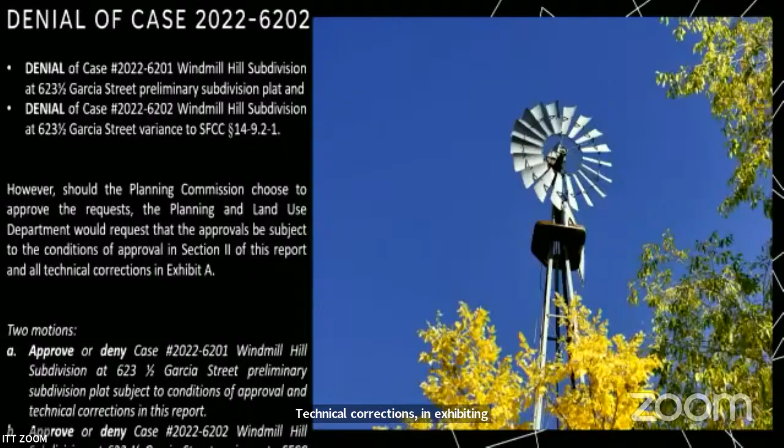There are 15 conditions of approval in the staff report. The technical corrections are found in Exhibit A. Following standard practice, staff will provide the applicant red line comments, and the applicant will make any necessary changes to comply with the conditions of approval and technical corrections, and submit the corrected plan sheets to the case manager to collect staff signatures. Should the Planning Commission approve the variance and subdivision, the subdivision plat shall be recorded prior to any vertical construction.

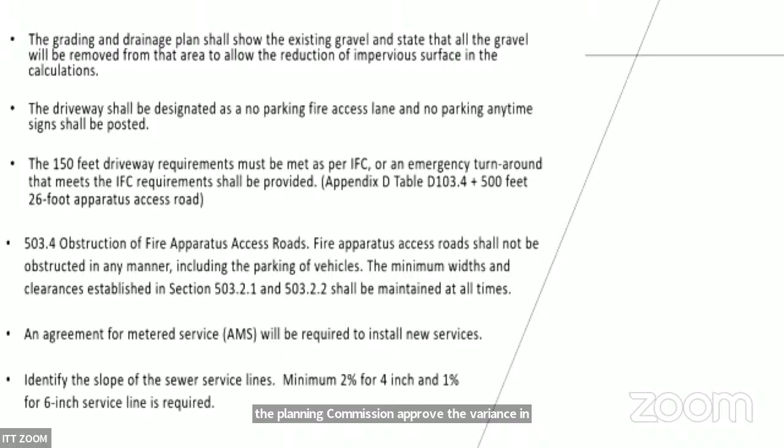623.5 Garcia Street is currently a 1.48 acre lot in an R3 zoning district that also lies within the downtown and east side historic district. There's a single family residence and a historic windmill on the southern end of the property. Neighboring lots include both R3 and R4 zoning districts.

This is our historic home right here, and the windmill is actually right here.

The subdivision will include 3 lots: lot 1 at 0.5 acres, lot 2 at 0.6 acres, and lot 3 at 0.38 acres, which creates a density of R3. The planned development will include 2 additional residences and yard walls, which are not yet designed. However, the property is within the downtown and east side historic district, so new construction and remodeling will be subject to Historic Districts Review Board approval.

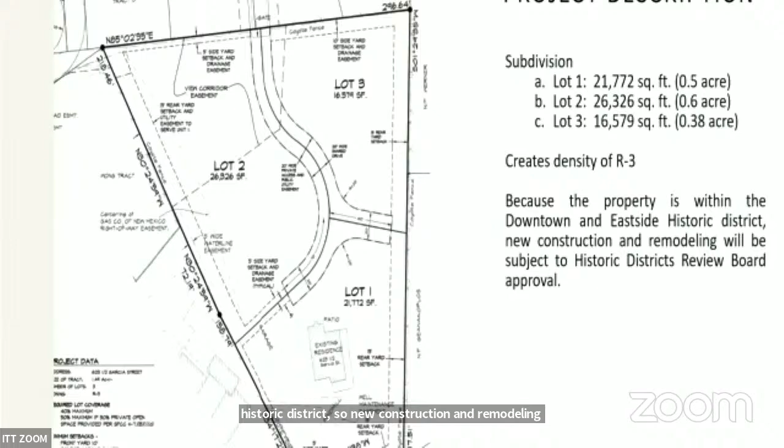Access to the proposed subdivision is off of Garcia Street via a series of private easements. I'm going to go through those for you.

So there is a 29-foot wide easement here, approximately 218 feet. There's a 20-foot easement here, running approximately 118 feet. There's a 38-foot wide easement that goes through here. This is an entrance into the property, it is 15 feet, and this is 20 feet.

Excuse me, we can't see anything that you're pointing at. Oh, my mouse here doesn't show. Okay, sorry, where? Can I come to the board with that? Help. This one, how does that sound? Okay, see if I can do this again.

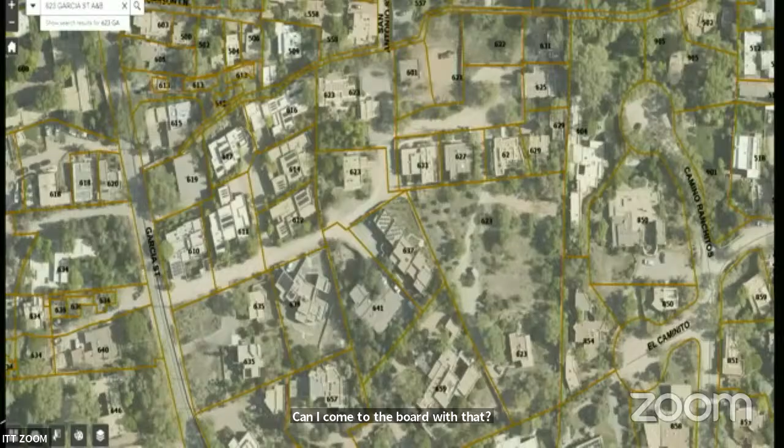So your 29-foot wide easement is here. This is the 20-foot easement here. This turns into 38 feet. This easement leads onto the property, it is 15 feet wide, and this leads onto the property at 20 feet wide.

There are currently 21 residences using the existing access easement. There are 2 additional residences planned, so there will be a total of 23 using this access.

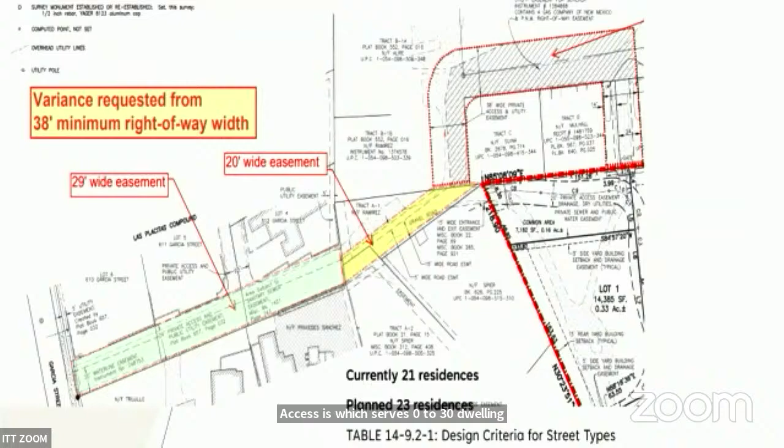Accesses which serve 0 to 30 dwelling units are required to be 38 to 42 feet in width and have design standards. The design standard is that this lane should have 2 nine-foot wide drive lanes, 2-foot curb and gutter, 5 feet of landscaping, and 5 feet of sidewalks on either side. In this case, the curb and gutter, landscaping, and sidewalks do not exist, and with the existing widths will not be able to be installed.

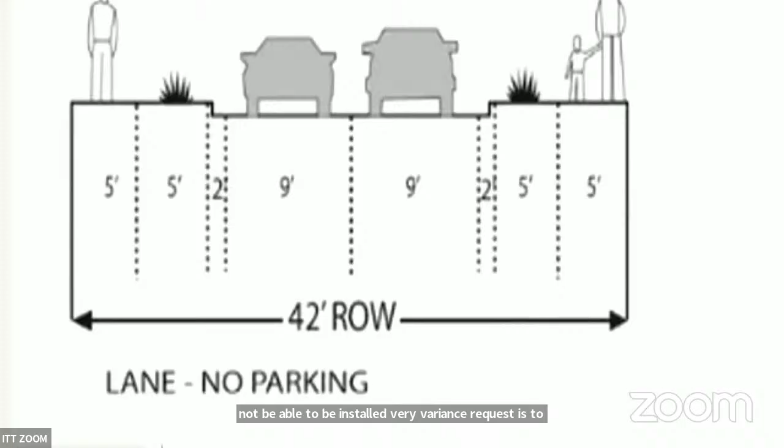The variance request is to have the narrower lane without the design required, having only drive lanes. Though not all criteria for the subdivision plat are considered to be met at this time, this is due to the need for the variance. If the variance to the lane width is approved, the plat for the subdivision can be approved as it will meet all criteria as long as the variance is approved.

Access to the proposed subdivision does not conform to the standards of SFCC 14-9.2-1 design criteria for street types, which requires a minimum right-of-way width of 38 feet for access to 0 to 30 dwelling units. The new subdivision does meet the density proposed by the future land use map and meets the general plan policy of infill development. This conflict and the increase in an existing nonconformity are the main reasons for staff's recommendation for denial of the variance and subdivision.

Staff recognizes that the request is similar to the case from 2012 for subdividing the same lot, which was approved by the Planning Commission in 2012. Staff has made a differing recommendation at this time based off of code interpretation and intent, with the understanding that continuing to make narrower lanes for increased numbers of residences increases risk and diminishes the city's responsibility for public safety.

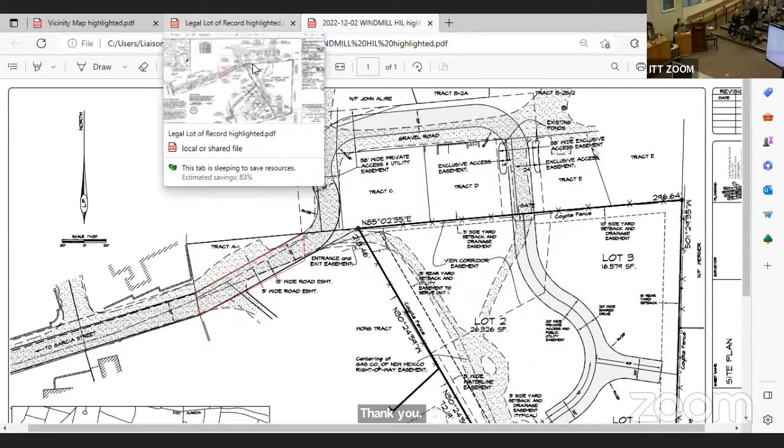Do any of the other commissioners have questions or comments? Commissioner Lawrence Faulkner: God, why am I having a hard time tonight? It's this mask, it's this mask I have on, I can't think properly.

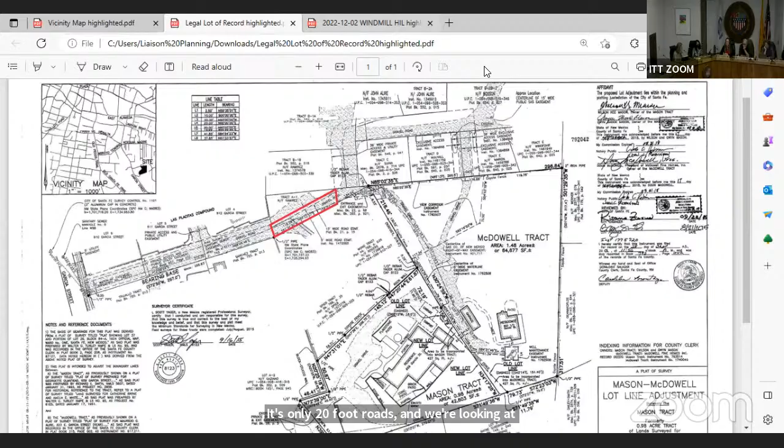I would just say this is one of the places where I feel as a commissioner that it's good we're working on the code, because I feel this is another place where we're probably going to have to rule from the bench, or at least have the opportunity to do so, which isn't the best way to do policy. But there are areas all over the city where there's no sidewalks and only 20-foot roads, and we need housing. So we're going to have to start looking at it in a different way than we've been looking at it in the past. Density is one of the ways we do that, and when you do density, you're going to lose some stuff, but we'll get housing out of it too. That's my only comment.

Any other questions or comments? If not, I'll entertain a motion. Madam Chair? Yes, I would have a question of the applicant. Okay, Commissioner Morondo, go ahead.

I just want to make sure I understood from the application and your comments earlier, two points correctly. One is that the original improvement was for 3 residences, and that's been reduced to 2. And the second point was about the area served by the later section of this road—can you speak to how many houses are on that area of road, in the neighborhood of 10 feet, and what you're going to be able to improve it to?

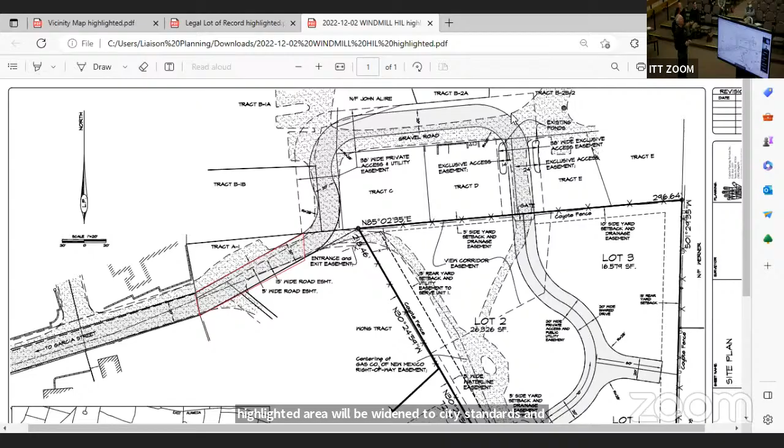No, it's going to be widened to code required city standards from that point in. The only section we'll be able to do at 20 feet will be the area highlighted in red. But when I say improved, I'm saying it'll be resurfaced, compacted. The area beyond the red highlighted area will be widened to city standards and resurfaced as well, which services all the houses back there. Does that answer your question?

Do you know the number, without your added load, who's on that road? Specifically, after it winds around Tract C? 1, 2, 3, 4, 5, 6, 7, 8, 9, and 11 with the addition of the 2 new units at 623 that we're requesting. Thank you, I appreciate it.

Thank you, Madam Chair, if you'd allow me to just make a comment then after my question. Sure. I suppose in this case, I completely agree

with Commissioner Faulkner that this is in sort of an interesting area of the code, and ruling from the bench is not always great. But in this case, what's interesting to me is it's true we're increasing a nonconformity if we approve the variance, but the proportionality of that - the fact that we're adding a relatively small amount of load to the existing situation - and I think there's a strong argument that those 9 units, or those 9 residences, have a safer situation because of this. To me, that argument is the most compelling in this case, that this condition exists all over the city. And for me at least, it's compelling that they're going to be improving the overall situation from what it exists. Thank you. Thank you, Commissioner Morondo.

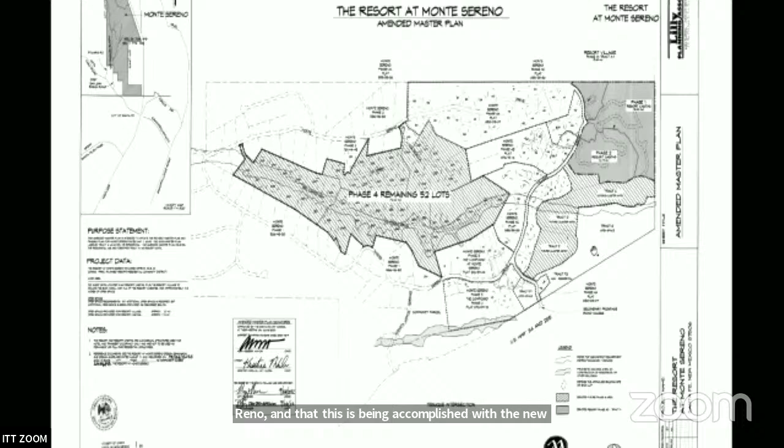I'm going to, if you can pull up the next slide, which is the development plan that we're reviewing tonight.

The cluster housing will involve a total of 50 units. There's 30 units located within the area previously identified as Tract C and D, which are directly east of the resort site. And maybe you can point those out, Amrit. All of these will be 2-story duplex townhomes with 2-car garages.

An additional 20 condominium units will be located further to the east, in the area identified as Tract E. These will involve 5 buildings, 2-story unit buildings with 4 units in each building for a total of 20 more. That makes a total of 50 in all.

There'll be 3 different home designs ranging in size from 900 to 1,200 square feet for the 4-unit buildings on Tract E, to 1,200 to 2,900 square feet for the townhomes located on Tract C and D. The architectural design can be described as soft contemporary Santa Fe style.

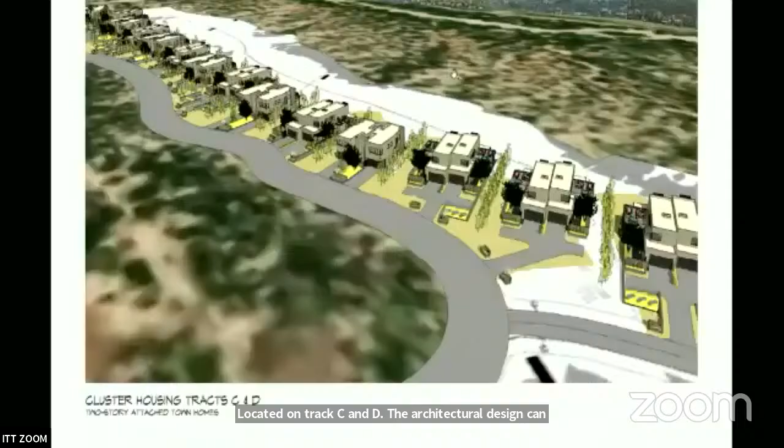And Amrit, if you can pull up the 3rd and 4th slides. These are the architectural renderings. These slides are meant to provide you with a flavor for the architecture being proposed.

The first slide is up in front of you tonight. It illustrates the 30 housing units that will look like what it will look like on Tract C and D. These are 2-story duplex townhomes, which will appear as large homes carefully sited to maximize mountain views. None of these homes have been located in the Ridgetop district.

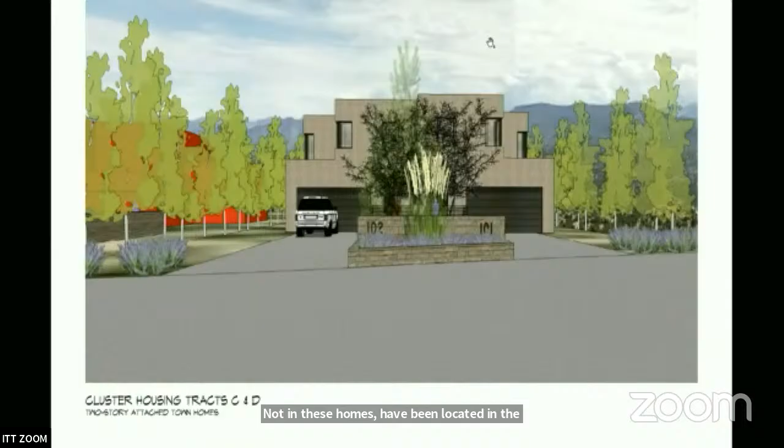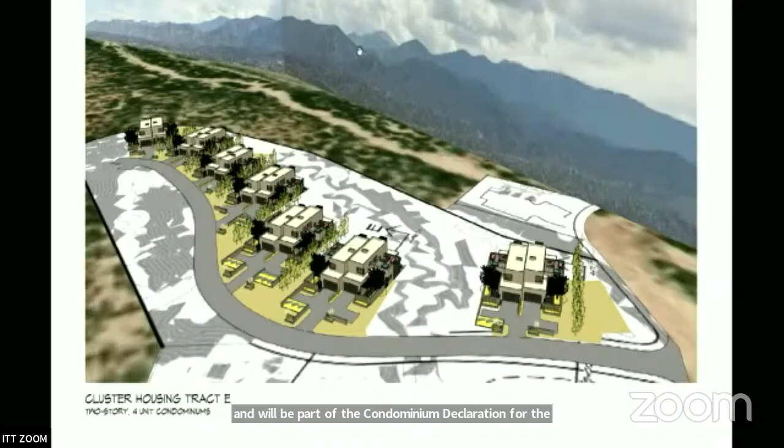The additional slides illustrate the 20 condominium units that are planned for Tract E. These plans are preliminary architectural designs on both of these tracks. The developer will have to submit detailed plans at the time of obtaining building permits. The draft set of design guidelines has been developed and will be part of the condominium declaration for the cluster housing, and these guidelines will ensure that the houses are compatible with the architecture throughout the Monte Sereno community.

We'll bring back the development plan slide, please, Amrit. Due to the remote location of the cluster housing in the northeast section of Monte Sereno, it is anticipated that the proposed development will really have a minimal impact on the rest of the community of Monte Sereno.

However, the cluster housing will have an impact on the resort site. It will be visible from the resort looking easterly. It will also have some impact on the lots that are just to the north side of Village Drive. Therefore, one of the goals of the development plan for the cluster housing is to recess the roads and the building pads, and we've done that approximately 4 feet by depressing the roads and the building pads. This will help to minimize the impact of those views.

Earth tone colors, a depressed access road and building pads, and appropriate landscape screening will all work to further minimize the view of those buildings. The site plan also proposes an extension of the trail system for the resort. I'd like to point out that we really have in excess of 3 miles of trails either built already or planned to be built, and we will be adding to the trails between these tracks. If you look, you can see the dotted lines between Tract C, D, and E.

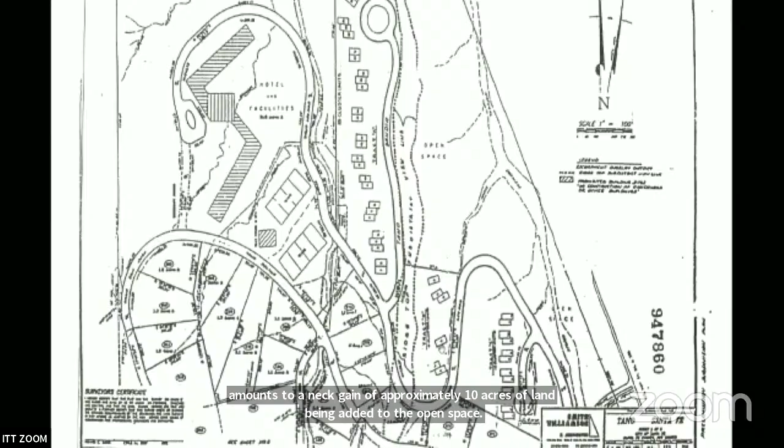This greatly reduced the amount of necessary tree clearing and grading. The additional advantage of the revised access is the addition of open space gained by vacating this right-of-way, plus the additional land that is no longer required for development on Tract D. This amounts to a net gain of approximately 10 acres of land added to the open space in this area. Now, if you can bring back the final development plan, Amrit.

Part of this application, we are applying for final subdivision approval for the cluster housing tracts. The final subdivision tract plat will also include the adjacent open space tract and the tract dedicated to the sewer lift station number 2.

Zoning compliance: as previously stated, the property is zoned Planned Resort Residential Community. The cluster housing units provided for in the A&D agreement are in conformance with the zoning, which encourages a variety of housing types.

We also have some variance requests. These variances have been reviewed and recommended for approval by city staff and are part of this application. They are basically related to terrain and stormwater management for road construction, and have already been approved in the annexation and development agreement. They just relate to the mountainous terrain we have in this area.

In closing, I would like to state our proof of substantial compliance with the preliminary development plan approval. As per section 3.1 of the annexation and development agreement, the developer has the vested right to develop the property in accordance with the approved plans, the A&D agreement, and the land uses permitted in the PRRC zone.

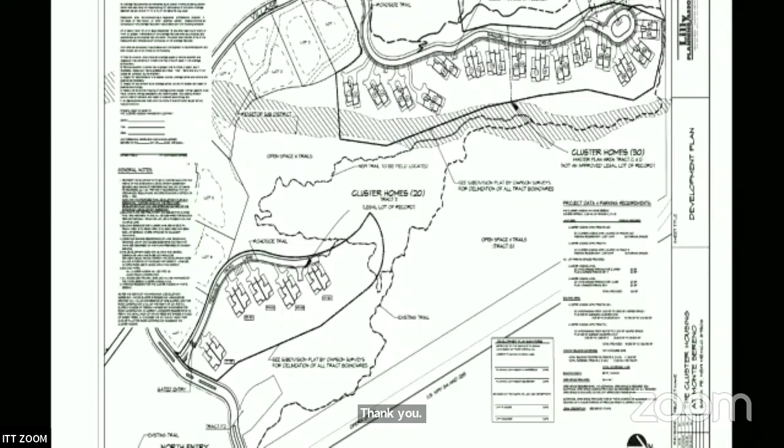Commissioner Clow: I did read through all this, and I'd like to hear in your words how, whether it's captured in the original agreement that led to the first stage or not, how you are addressing the issues of affordable housing in this development, which is clearly an upper scale development.

Actually, the affordable housing requirement is met in the annexation and development agreement. I don't have that in front of me, but it's paid for at the time of building permit application.

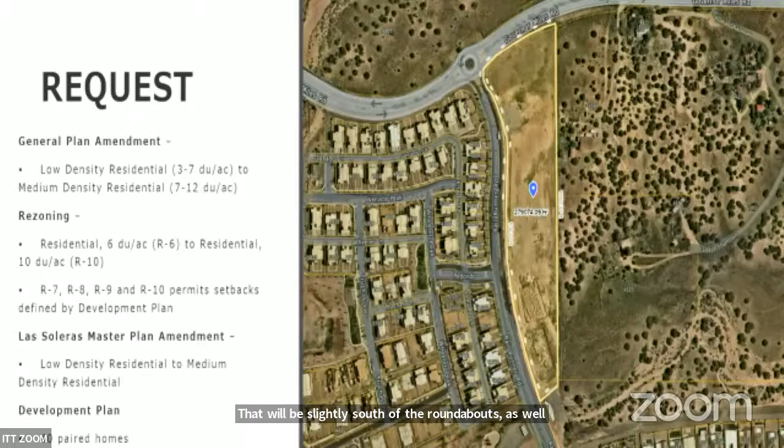The primary roadway, Redondo, goes into the existing Villas de las Soleras development, directly across the street, and will be the main access point for the subject development area. There will also be an emergency access point slightly south of the roundabout. The detention is planned for the southernmost portion of the site. Does that help? Great, all right, moving on to the rezoning.

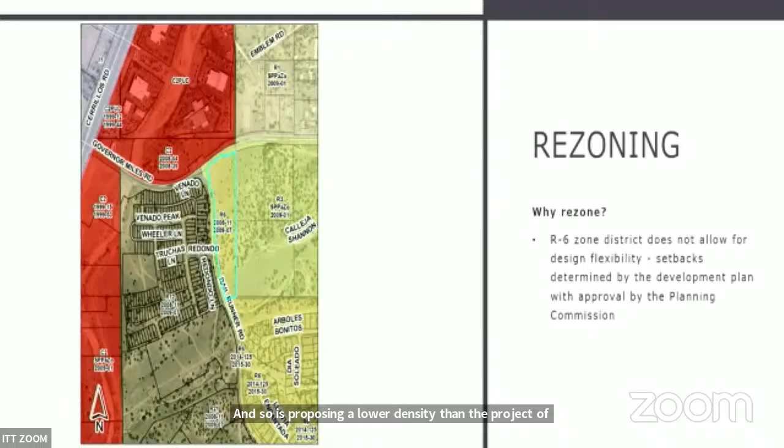The existing zoning category is R6. It was intended as part of the Las Soleras master plan to be a transition between higher density neighborhoods and lower density neighborhoods. To the east it's predominantly large lot, single family detached units. However, the applicant has decided that the same product would be advantageous for this tract of land, and is proposing a lower density than the Villas de las Soleras phases 1 and 2 across the street, at 5.8 dwelling units per acre.

The master plan amendment - I've gone over this a bit. You can see it highlighted in red up there; it would go from R6 to R10, or medium density residential. Here's a view of the site.

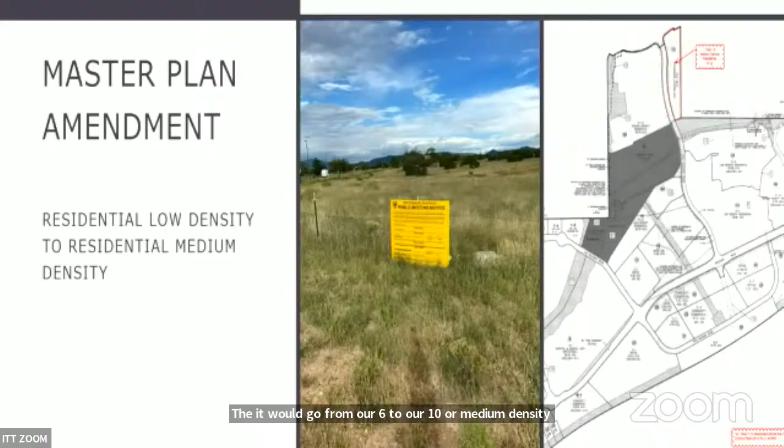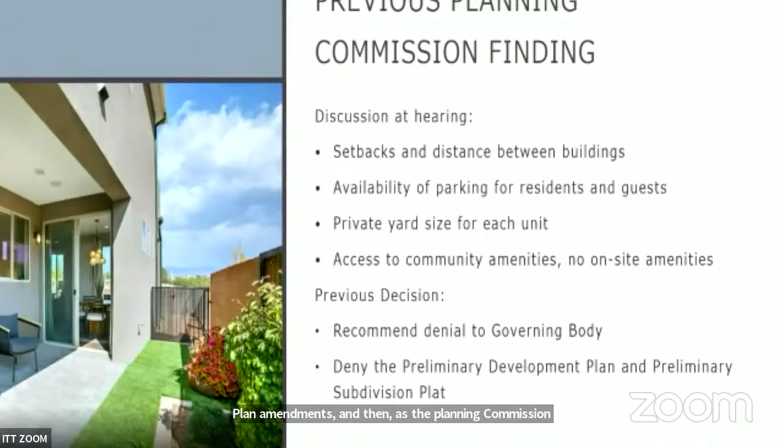The finding at the previous planning commission meeting included discussion of setbacks and distance between buildings, availability of parking for residents and guests, the private yard size for each unit, and access to community amenities. There was concern that there were no on-site amenities. As stated previously, the previous decision was to recommend denial to the governing body for all of the general plan, rezoning, and master plan amendments. As the planning commission is the final authority on the preliminary development plan and preliminary subdivision plat, that was denied, and it was never appealed to the governing body.

With reference to the development plan layout, the homes will face similarly to the fronts of homes further west on Governor Miles Road, so there'll be presence on both Governor Miles and Rail Runner in terms of 360-degree architectural ornamentation and detailing. There are some units along private drives on the eastern portion of the site, and some green spaces towards the south.

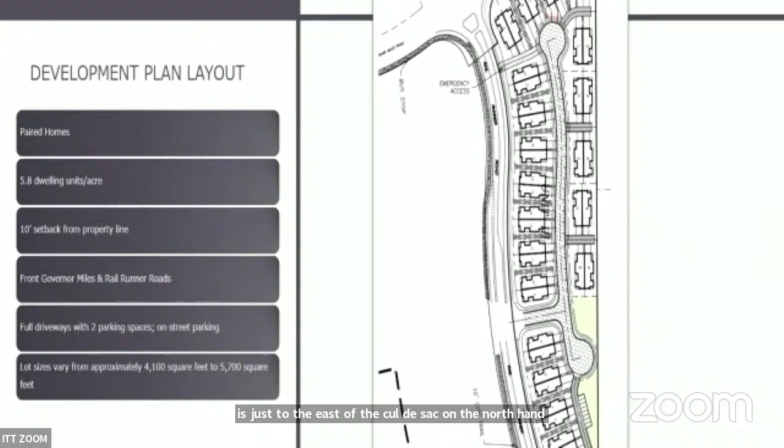Predominantly, the area furthest south is the detention area. But as a condition of approval, staff has asked the applicant to amenitize the space just east of the cul-de-sac, on the north-hand side of the southern cul-de-sac, so that it has a pocket park type of feel. There will also be access to the park amenities in the first phases of Villas de las Soleras across the street. One discussion point during the development plan review was the emergency access.

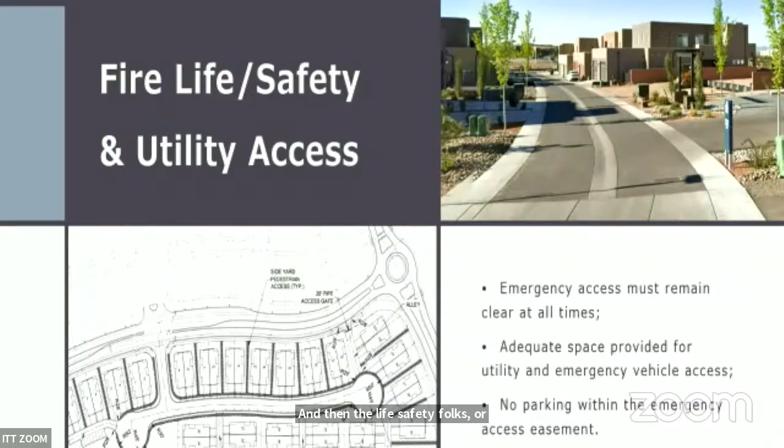Originally, there was discussion about whether there could be 2 full access points rather than one emergency access and one single entrance, but it was determined the intersection would be too close for that. On the right-hand side of the development plan, you can see the access point and access gate, which was redesigned to accommodate both fire life safety and utilities. There were concerns about having that access, and with these denser developments, there's also been problems with people parking in the emergency access, preventing life safety personnel from gaining access that way. So if there's a problem with the primary entrance, there would be no other way for them to get in.

So with reference to the staff recommendation for the preliminary subdivision plat, staff found that there is regard for the natural features and other assets. It is designed in the best interest for the public health, safety, and welfare. The infrastructure design, improvements, and dedication standards are met. And provided that the rezoning is approved, there will be no nonconformities.

So once again, going back to that issue, there's only certain zoning districts that allow for setbacks to be determined by the development plan. And just to note, the setbacks as they were concerned before, the distance will be 20 feet between each building, so there will be a 10-foot setback and a dividing yard wall as well.

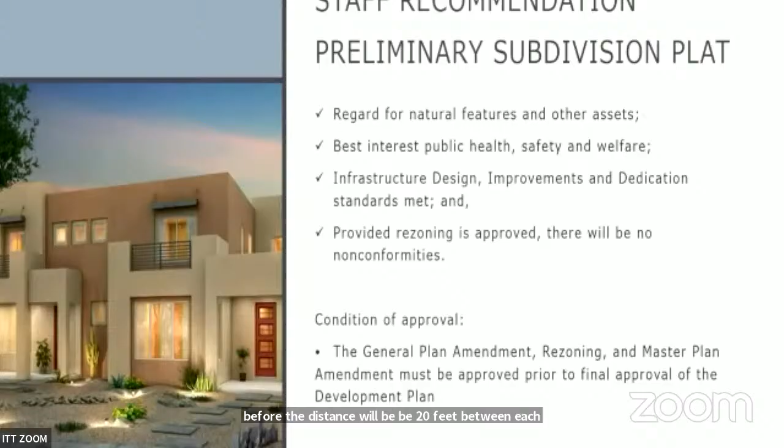And once again, this decision will not be final until the City Council finds and approves the general plan amendments, the rezoning, and the master plan amendment. Staff would like to add a condition of approval that must be met prior to final development plan and final plat. That concludes my presentation.

Okay, any other clarification questions? If not, we'll hear from the applicant, and it would be great if you could point out what was changed from the last design.

Do you swear under penalty of perjury that the testimony you're about to give is the truth, the whole truth, and nothing but the truth? I do. Please state your name and address for the record. Yes, my name is Nathan Manzanares, and I'm with New Mexico Land Solutions at 915 Mercer Street, Santa Fe, New Mexico.

Thank you, Heather, for your in-depth presentation. As Heather stated, this has a pretty lengthy history, but hoping to clarify some things. The biggest is the dimensional standards that are required under an R10 in order to design the type of product that we're doing. You can't design attached townhome units under an R6 zoning. So the rezoning request was asked in order to finalize a design.

And I'll do a comparison of what the 44-unit proposal looked like and the new and improved 40-unit proposal that really does enhance quality of life features that the Planning Commission wanted addressed. So as Heather stated, this project is located between Governor Miles and Rail Runner Road.

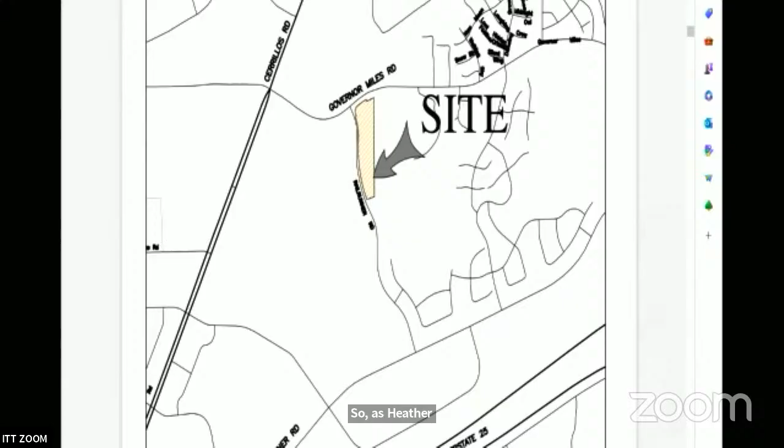Here is a phasing plan of the overall Villas de Las Soleras. Units 1 and 2 are to the west of Rail Runner Road, and unit 3 is to the east. The intention of Villas de Las Soleras was always to provide the townhome product to the Las Soleras area, providing a mix of housing types in the overall master planned area.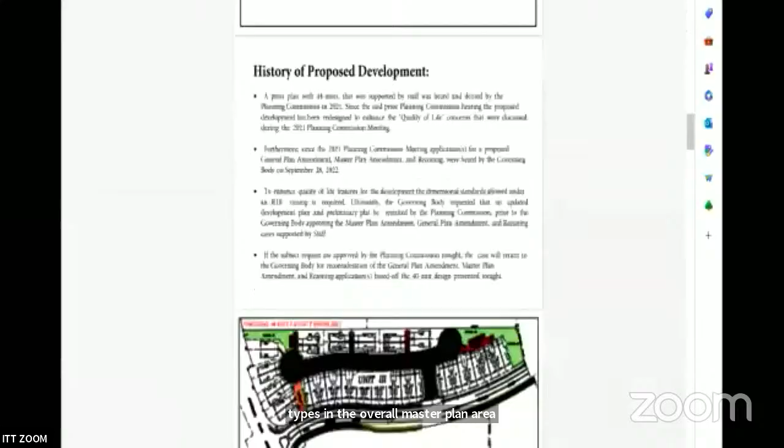Heather did a good job talking about the history, so I won't go into that too deep. We got a good response from the governing body that they like this type of product, the attached townhouse product. But this is the original 44 lot layout. As you can see, the yards are a little smaller, and there's not as much on-street parking or additional parking provided.

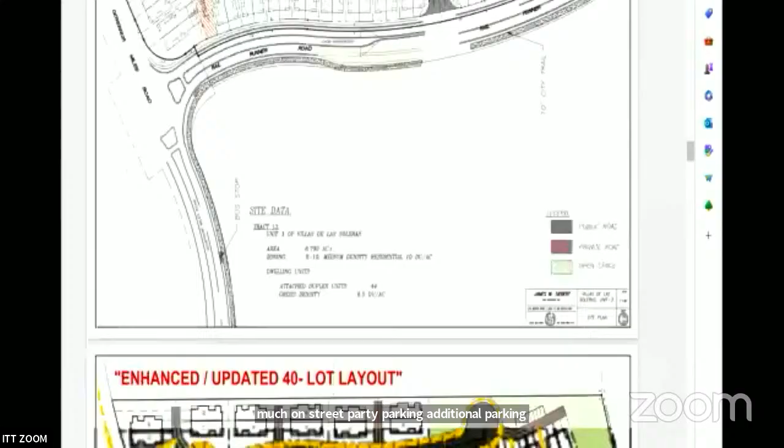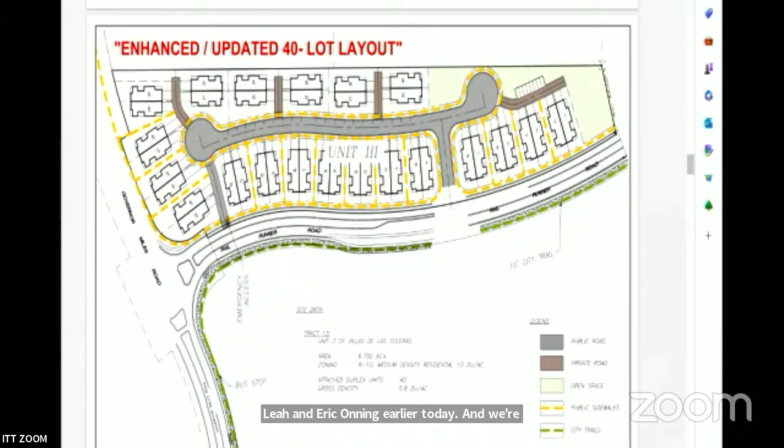With the new design, we've been able to incorporate more walkability, bigger lot sizes, and greater separation between units. The yellow hatched line highlights all the sidewalks proposed within the development. So basically anywhere here, you have an alleyway or access to either Rail Runner Road or Governor Miles that links to the city trail outlined in green. We had good discussions with MPO staff, Leah and Eric Awning, earlier today, and we're actually going to do a trail connection here between lot 29 and 30. I'll go into that in more detail.

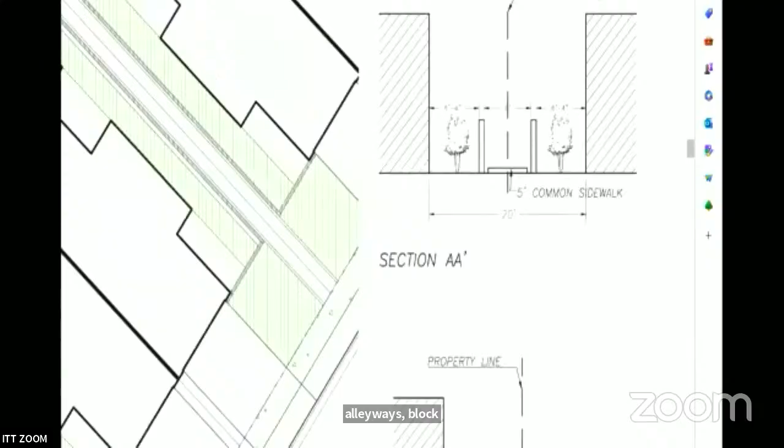This is an outline of the new design showing the new alleyways, the block walls that separate the units, the 20-foot increased distance between units, as well as these sidewalks throughout. We think this is a good design, and it was actually approved in another Pulte project, the Caja del Oro project recently. That project really spurred this design, which helped with the quality of life issues that were brought up, and really gives it more walkability for the public here.

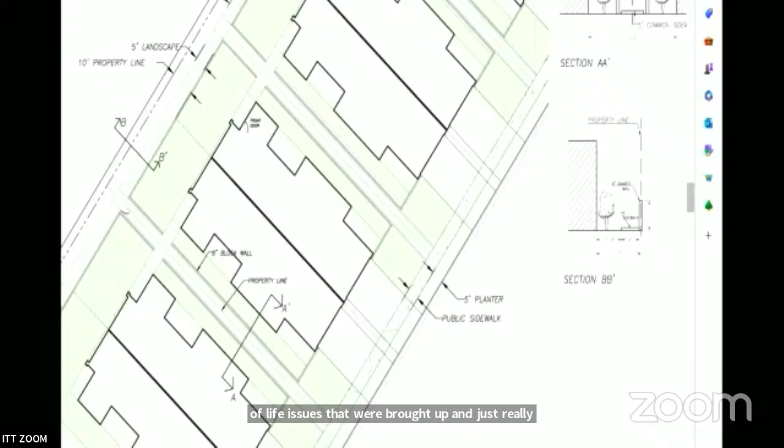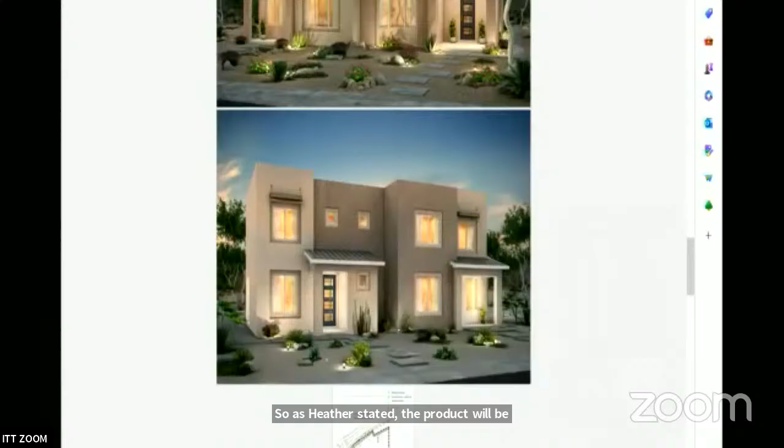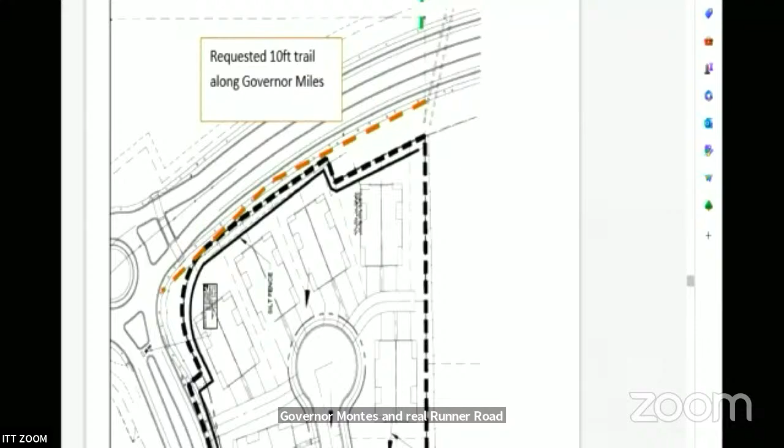As Heather stated, the product will be attached townhome units similar to what's in 1 and 2. This is the new trail we talked about. The packet states there should be a pedestrian crossing along the northeast boundary. With discussions with staff at MPO, and highlighting all the new sidewalk entries onto Governor Miles and Rail Runner Road, they've agreed to allow us to do a multi-purpose trail to the edge of our property that will line up with the planned Arroyo Chamisa Trail.

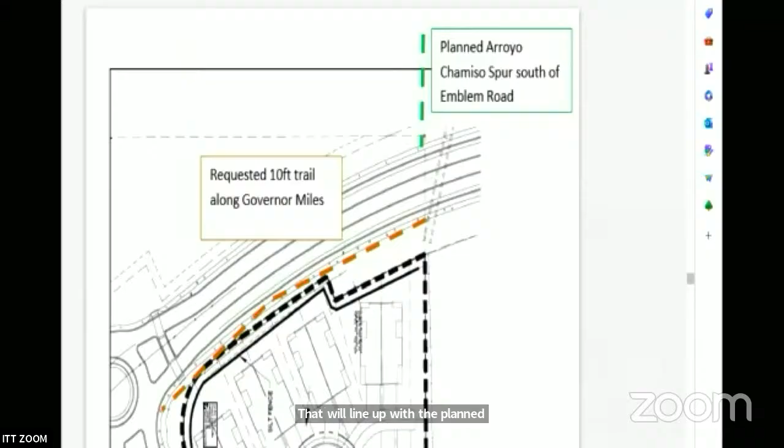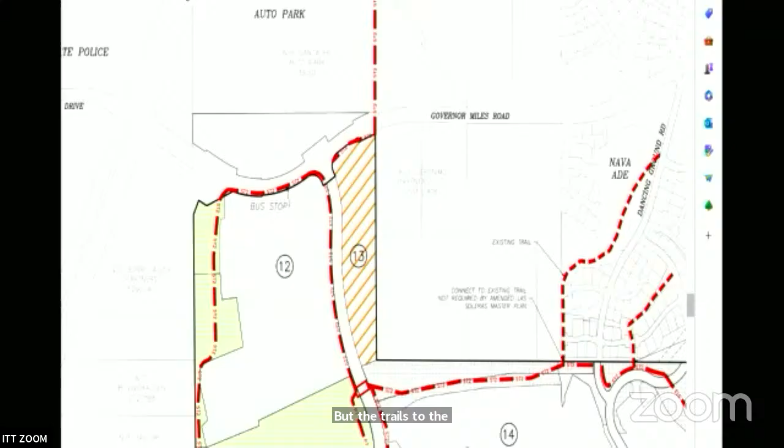This is consistent with the overall trail master plan in Las Soleras. This is the edge of our property here. This trail on Emblem to the north does not exist yet; the city is working on getting that established. But the trails to the west that run along Governor Miles do exist and run down Rail Runner Road as well. I have some image shots here.

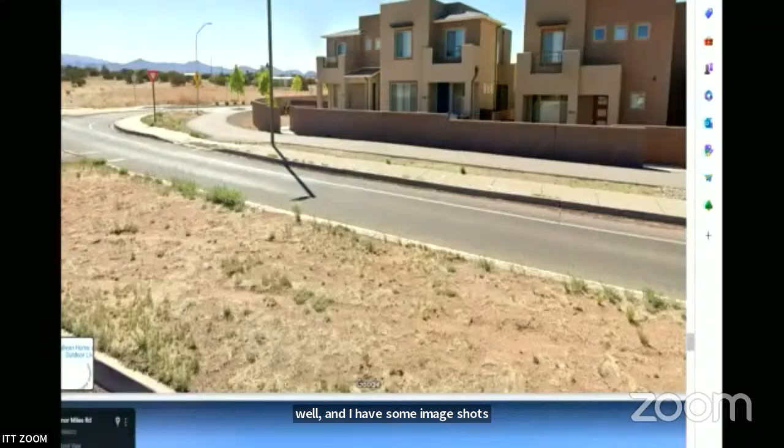This is across Governor Miles in Unit 2, I believe. This is the asphalt trail that is going to be extended along the boundary of Governor Miles on our tract. Along here, there'll be a trail extended, continuing down along with this existing sidewalk, ultimately all the way down to the new connection for Arroyo Chamiso.

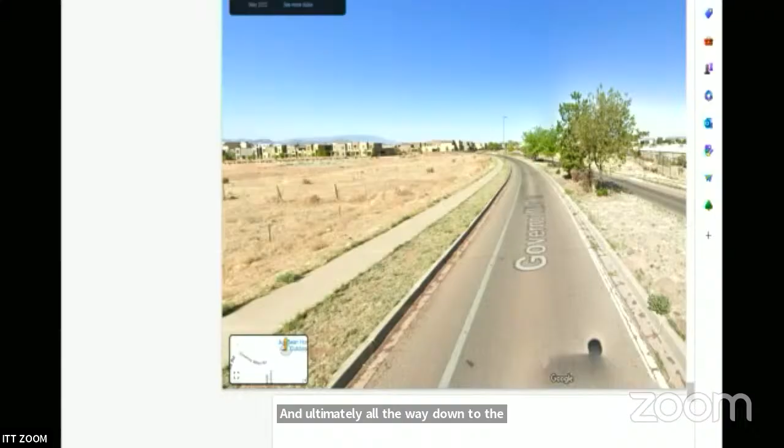That concludes my presentation. If you have any other questions about the changes that were proposed, I'd be happy to answer them, or any other questions you have regarding the overall development.

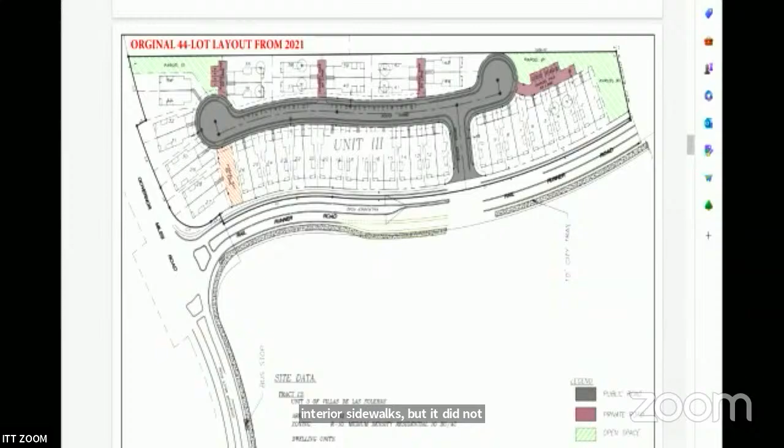Yeah, thank you, that's exactly right. On those yellow lines, will there be walls on either side? How will they be set up? Madam Chair, Commissioner Lawrence, the original proposal did include interior sidewalks but did not have those access points. There were some, but nowhere near as many as what we're proposing now. But we do have a cross section of what it will look like here.

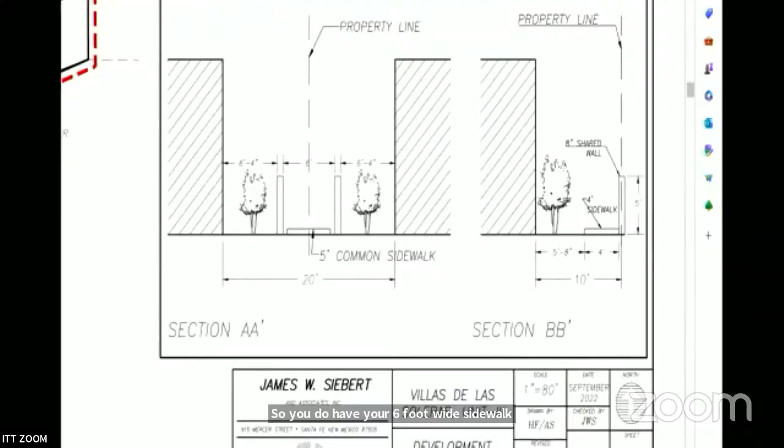So you have your 5 foot wide sidewalk here. Each side of the adjoined properties, each half will have a small piece of yard that's their own personal property. There will be, is that a 5 foot wall? Yes.

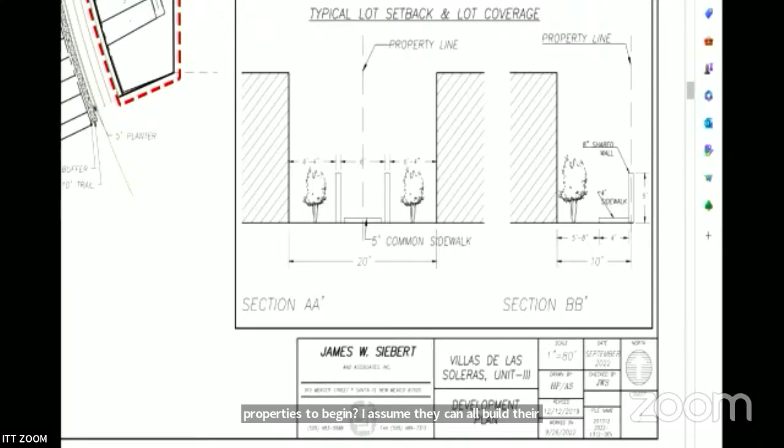And then a 5 foot wall and then a sidewalk in between each of the properties. Okay, will the properties be able to build their own walls in front and back later? Will they all be surrounded by wall? I mean, will people essentially be in a tunnel of wall as they walk through, or how will that work? How will that feel for the people who are there?

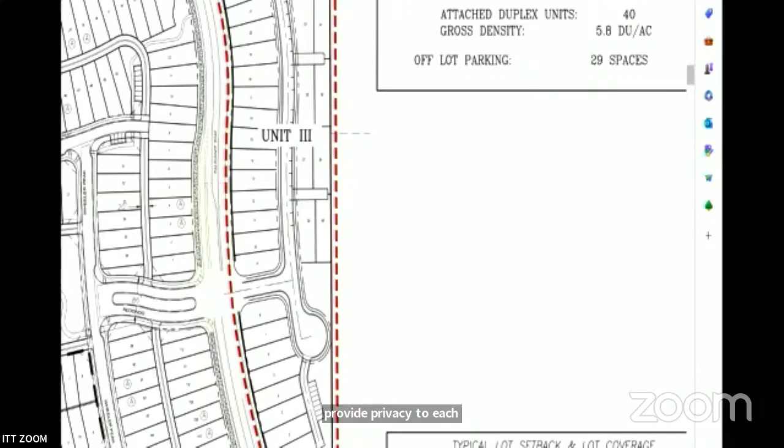Well, not necessarily. Those walls are only 5 feet high, so it's not going to be a tunnel per se, but it will provide privacy to each homeowner, since there will be people utilizing that walkway, while also providing greater separation of 20 feet, which was a concern on the prior design that there wasn't enough separation. So the wall acts as a buffer, increases separation, and provides safety. Yeah, I appreciate the increased buffer, I think that's important for the people living here.

On another topic related to connectivity, this property is right along the side of an open property. You have a couple of cul-de-sacs here, a couple of alleys here. I don't know anything about that property next to you, but is there any consideration of a possible connection, so we don't have walls and little tiny compounds?

Madam Chair, Commissioner Lawrence, I believe we're going to do some perimeter walls along the eastern boundary, so that connectivity really wouldn't happen in that sense. There is the trails and plenty of walkability along Governor Miles and Rail Runner Road to get into the Las Soleras trail system and Arroyo Hondo trail system. So you're connecting to that trail on the northernmost point.

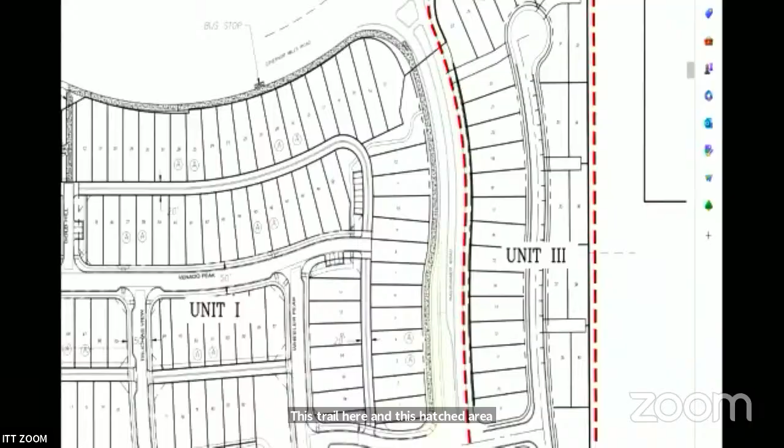Is there any trail connectivity going to the south, or is that getting on Rail Runner if you're moving south from where you are? Let me see here. Well, you can actually see it here, this trail and this hatched area here. Sorry, I can't see your cursor. Let me just go to the aerials that we have.

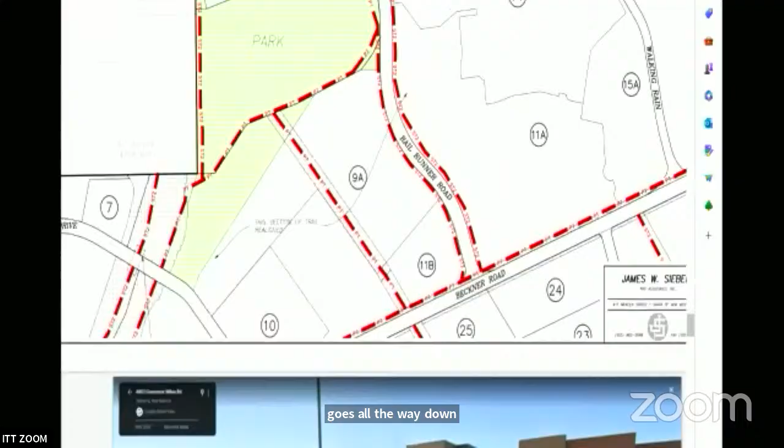So this trail here, on the opposite side of Rail Runner, runs all the way down Rail Runner. It's not on our side of the street, but it does run all the way down. If you're a Governor Miles resident interested in moving south, not by car, that's how you'd do it. Well, there is a crossing there that ties into, what is it, Redondo, that you can get onto. And there's also sidewalks there as well.

Okay, back on that picture, that looks like it could be approximately a 5 foot wall, is that right? Madam Chair, Commissioner Lawrence, that is correct. Okay, thank you, that helps. I don't think I have any further questions at this time. Thank you. Any other questions? Yes.

Chair Clow, I was concerned with reference to the recommendations that were rendered by the Planning Commission last time. So I'm going to read the minutes. The full motion for these cases discussed the master plan being amended, and if it could not be amended, the rest of the project could not proceed. Commissioner Sategna moved to deny because it fails criteria 1, that the master plan is consistent with the general plan regarding quality of life. In case 2021-3814, general plan amendment, the Planning Commission recommends denial because it fails criteria 2, consistency with other parts of the general plan based on quality of life. In case 2021-3815, the rezoning is denied because it fails criteria 3, that it's consistent with applicable policies of the general plan, including the future land use map, with regard to quality of life. That was the Planning Commission's decision at that meeting.